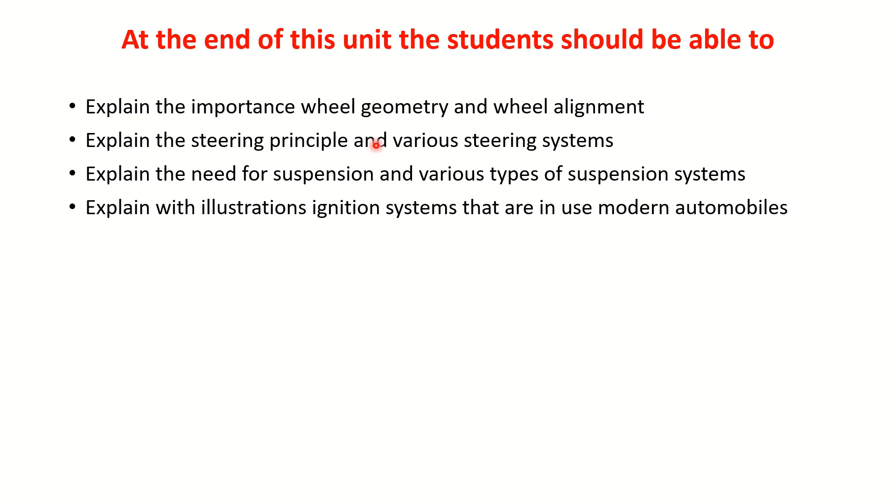Basically, in the car, our idea is while running the car, the wheel should remain perpendicular to the ground and the wheels should be parallel to each other. So we say that a wheel alignment consists of adjusting the various angles of the wheel so that they are perpendicular to the ground and parallel to each other.

So the purpose of this adjustment is to have maximum tire life and a vehicle that tracks straight and true when driving along a straight and level road.

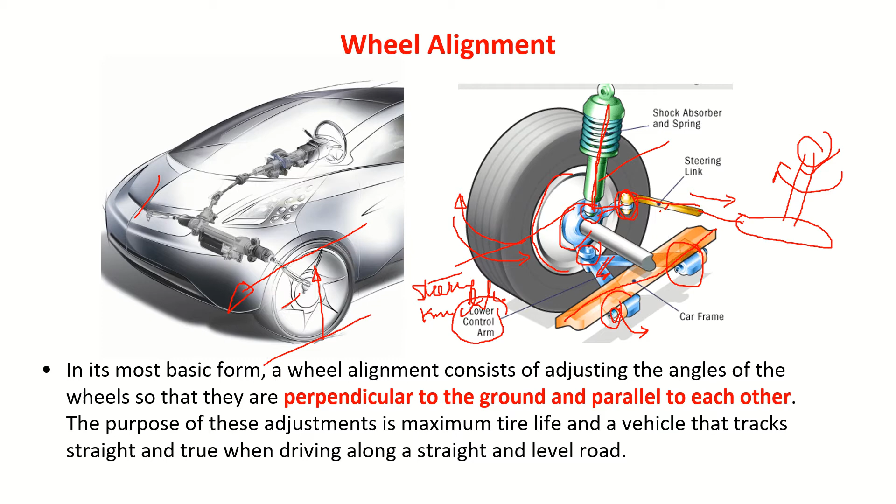Same here also. Or due to some reason, these linkages may get damaged. And wear and tear of the tire might happen. Because of all these reasons, wear of the steering and suspension components, bent or damaged steering or suspension parts, or sagging springs which can change the ride height of the vehicle, the alignment angles may change.

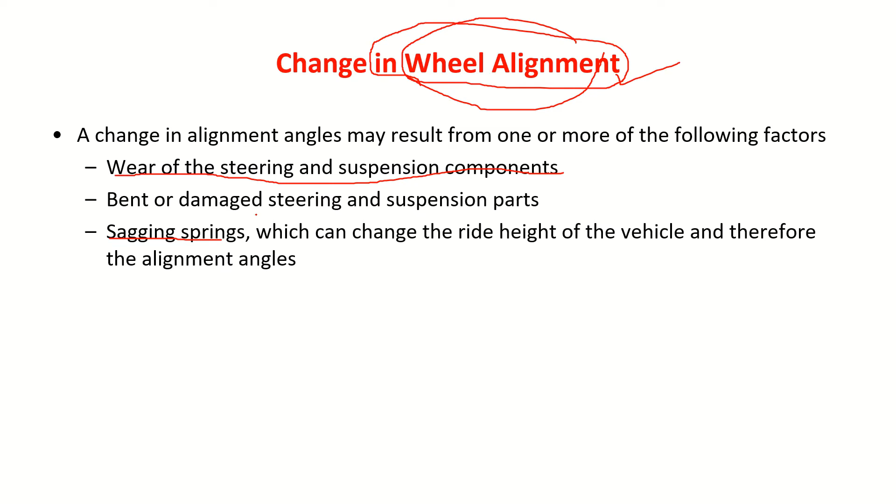So if the alignment angles change, what really happens? When you start steering, you may experience pull. What is that pull? It is defined as a definite tug on the steering wheel toward the left or right while driving straight on a level road. Suppose this is your vehicle.

So while steering, the vehicle may start pulling towards the left or towards the right depending upon which wheel alignment angles are changed. There will be a force and we have to counter this continuously using our steering system. So it will start generating pull. It may make the vehicle unstable sometimes.

Correct? That is a basic problem. Suppose you are running on a camber or a road with crown and all that. It may start drifting. What does drifting mean? It's a mild pull that does not cause a force on the steering wheel that the driver must counteract. When the vehicle moves towards one side or the other, this is called lead or drift; it could be caused by the crown of the road, etc.

Another thing that can happen is wander. Say you continuously have to move your steering wheel like this, continuously correcting. It is a condition in which almost constant steering wheel corrections by the driver are necessary to maintain straight ahead direction. So if the alignment angles change, these are the kind of problems that you face.

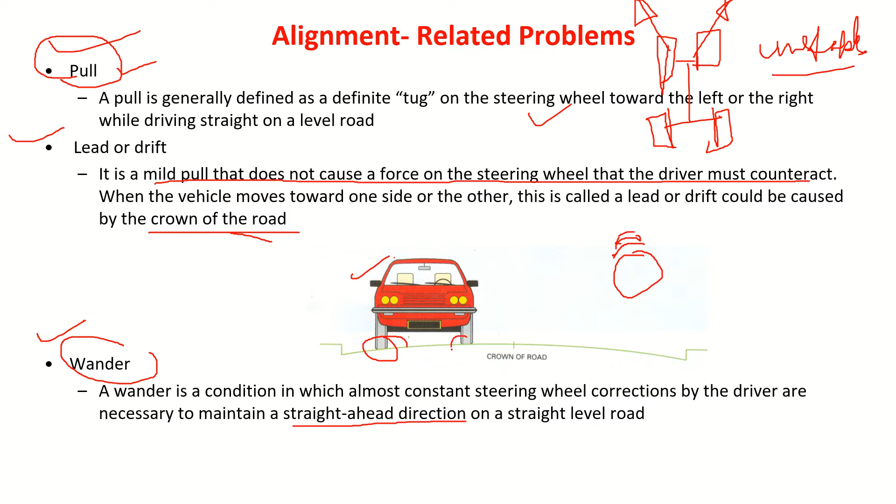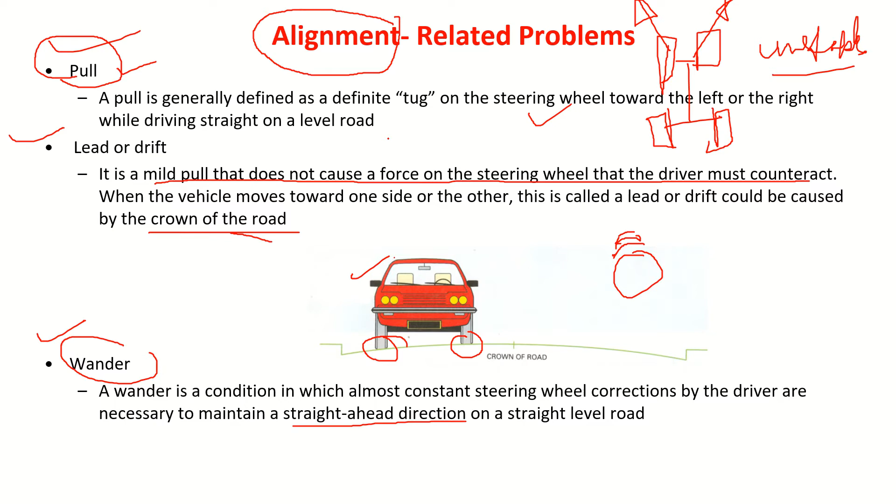Not only that, uneven wearing of tires will also happen. So hence it is necessary to maintain manufacturer specified alignment angles. If that is the case, what are those alignment angles? Let us look. One of the angles that is important is camber.

What is camber? Look here, let me put the tire straight, that is perpendicular to the ground. From the midpoint of this tire, which is in contact with the ground, let me draw a vertical line, and also draw the center line of the tire. That center line and vertical line are just coinciding here. Now, if you look here, from this center point I draw a vertical line. You can call it the line through which the weight will be acting. Then take the center line of the tire. Okay, it will make an angle.

Here also you can see it the same way. A vertical line from the midpoint where it makes contact with the ground, and also the line which passes through the width of the tire, will create an angle. This angle I call the camber angle. Now if you consider this is the center line of the vehicle, this I call inside, this I call outside.

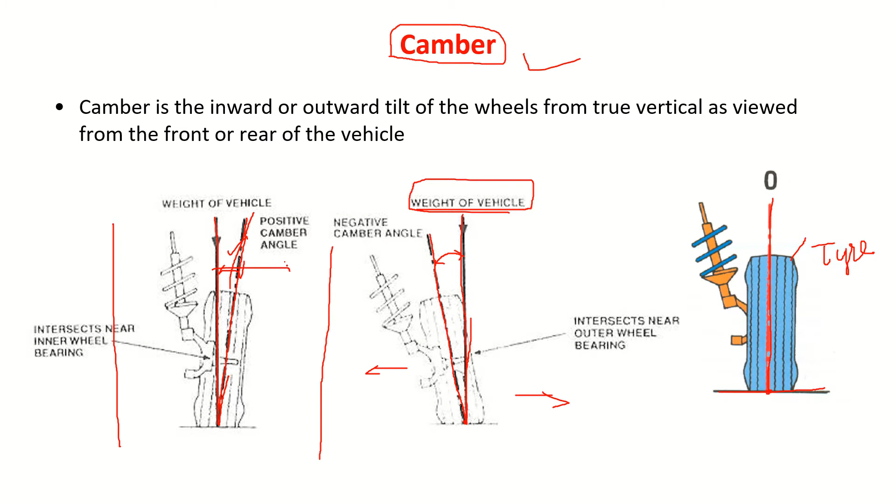Now it is tilted outwards. This I call positive camber. Here it is tilted inwards. I call it negative camber. You can see this, if these are the tires. Now you see the front view of the vehicle. When you see the vehicle from the front, these are the vertical lines. If the wheels tilt outwards, then they will have positive camber. If they tilt a little inwards, then we will have negative camber. So you always have to see from the front view of the vehicle.

Okay, so camber is the inward or outward tilt of the wheels from true vertical as viewed from the front or rear of the vehicle. Hope the point is very clear. So that angle we call the camber angle, with positive camber, negative camber, zero camber. Whatever I explained, I have written down there once again. If the top of the tire is tilted out, then camber is positive. If the top of the tire is tilted in, camber is negative. If the wheel is truly vertical, camber is zero. And we measure it in degrees, whether it's 1 degree, 1.5 degree or 2 degree; we will see that later.

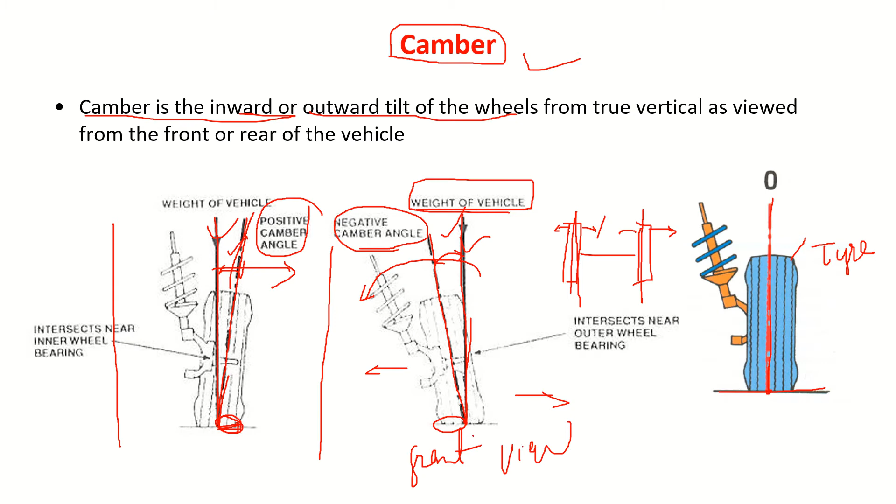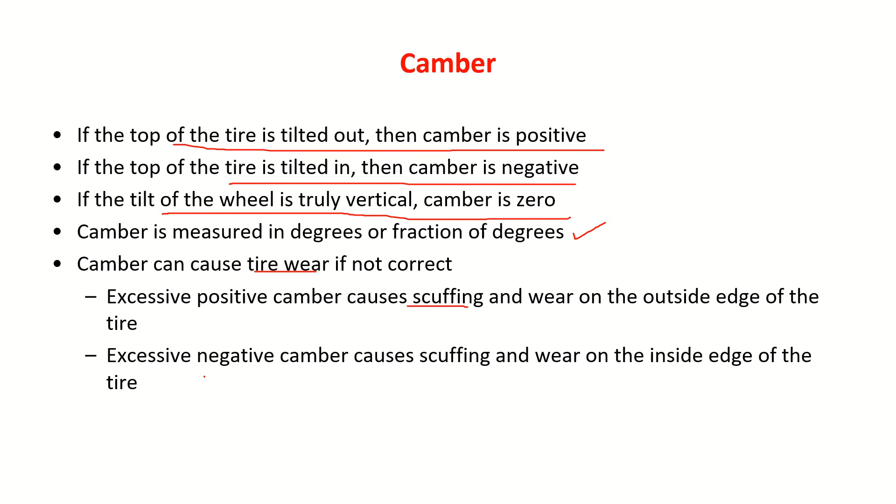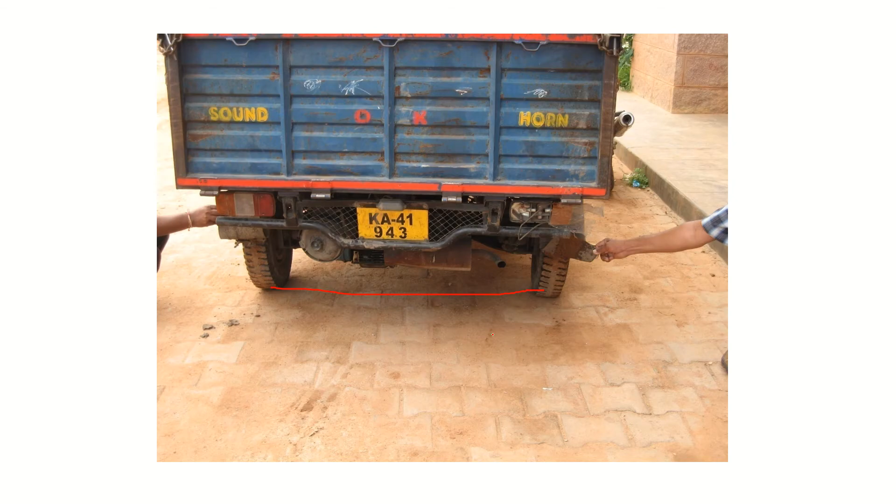It is desirable that the positive camber on both the left and right wheels remain the same. Definitely there will be small variation because of various reasons which I do not want to deal with now. So it is preferred to have the same angle. Okay, right, sir. Now here also you can observe the positive camber.

So now many vehicle manufacturers specify or adjust, they will have positive camber on vehicles. Why that? I have just drawn the three views of the vehicle here. Let us see the front view of the vehicle. So you have suspension and all that.

In the unladen condition, if it is having a positive camber, the wheel would tilt like this a little bit, depending on the camber angle. But the moment it is loaded, the suspension system will push this so that they become vertical, so that while running, they remain vertical.

So camber usually decreases as the vehicle is loaded or when the spring sags. If camber is kept positive, then the running camber is kept near 0 degrees for best tire life, so that there will be a uniform contact with the ground. So that's the idea of positive camber. But there are cars with slightly negative camber also, right? Camber design.

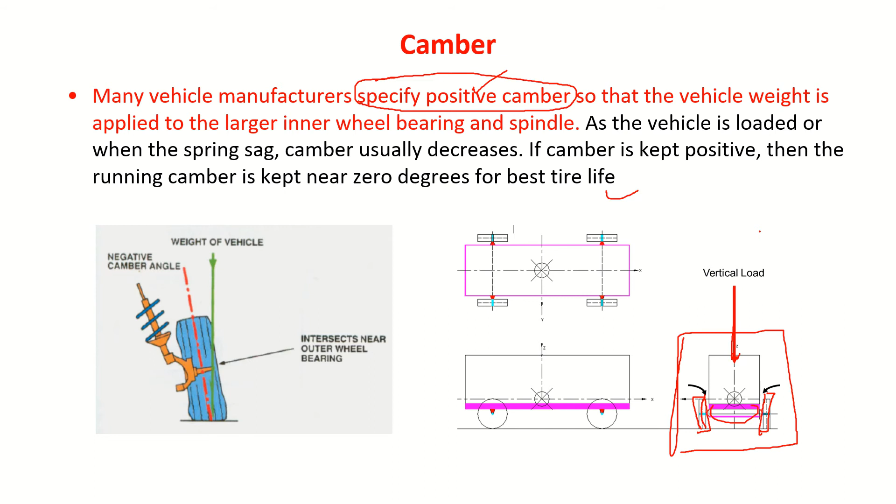So now the next, there is what we call camber thrust. What is that? Let us say we are given a positive camber. The vehicle is taking a turn or whatever it is. You can see that because of this camber, there is a reaction force acting in the outward direction. When it starts rotating, it will be pulling inside. For that, there will be a reaction outside, opposite to this. This reaction is what you call camber thrust.

Correct? So to compensate the reaction, a camber thrust will be active. Camber thrust will always act in the direction towards which the wheel is tilted. That means for positive camber, it is this. So it will create a lateral force. This lateral force I call camber thrust. You can imagine a cone is rotating, it's trying to slide like this. So to oppose that, there is going to be a reaction force.

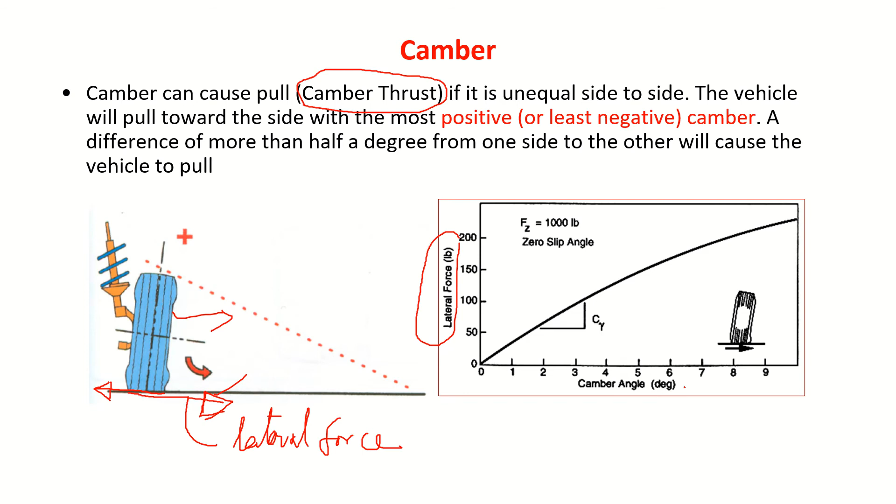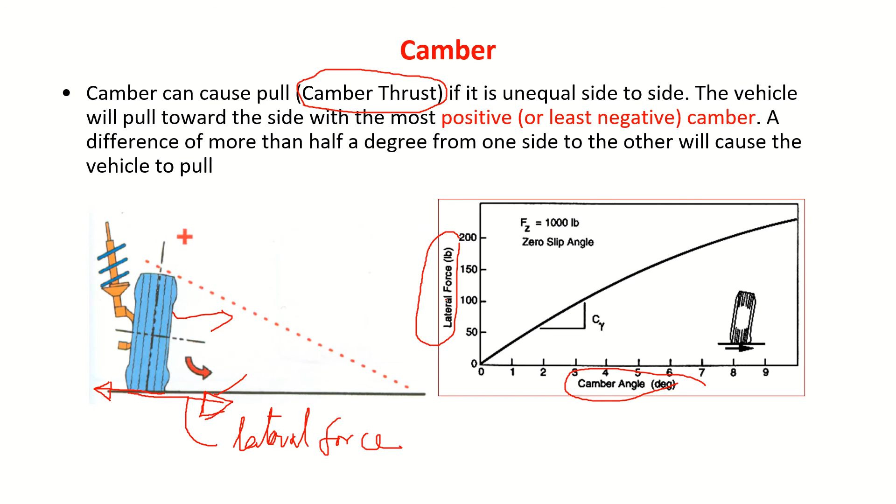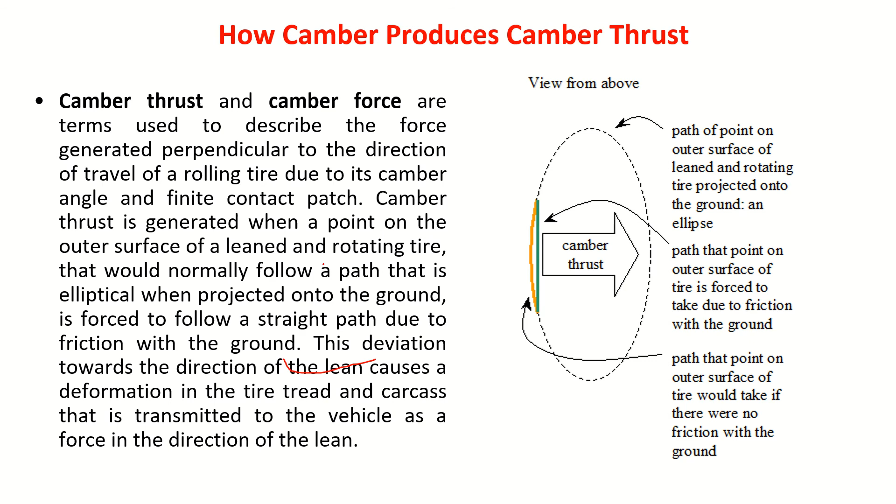Here, this lateral force or camber thrust versus camber angle has been drawn. So for the camber angle, what is the kind of thrust or lateral force it can produce? You can take from here. So this is what I was just explaining, how exactly a camber thrust is created. This is what has been written over here.

So camber changes dynamically, during dynamic conditions. Let us say this is the initial wheel position. This is the upper control arm of the suspension. This is the lower control arm of the suspension. If I just extend these two, they will meet at one point. Let me call it the instantaneous center.

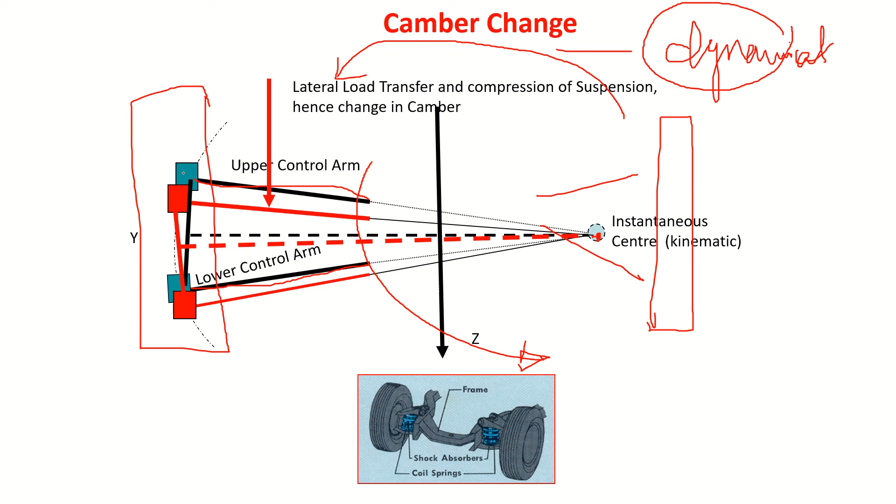So now just imagine the vertical direction. Suppose this vehicle is taking a turn like this. This is the right side or outside, and this is inside. There is going to be a lateral load transfer from left to right. This is exactly what I have shown, the force. Because of this load transfer, it may assume a new position. That's exactly what I said, camber changes.

So here it is like this. The more load gets transferred to this side, the suspension may get compressed. Then the wheel may tilt outwards. This wheel may tilt a little inwards because it gets released like this. So that way it is going to change. Camber changes during dynamic conditions. Whenever you are taking a turn, because of lateral load transfer, camber changes.

But the moment you change the camber, if there is too much of a camber change, then what is going to happen? There is going to be a larger lateral force on this side and a smaller lateral force on this side. There is a chance the vehicle will start pulling to that side.

Okay, now what exactly happens? Let us see now. So this is what I am calling an independent suspension. So here you can see the frame. Relative to this frame, I have fixed the wheel. The wheel will move relative to this, up and down.

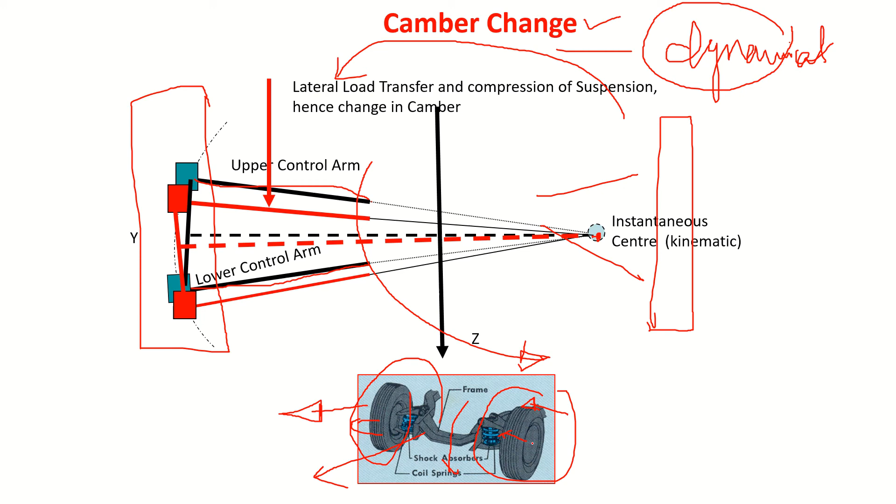If it is moving up, it will not really interfere with this. Means this is independent. The motion of this wheel with respect to this is independent of this. Okay, you can call it an independent suspension also. But if it is a solid one, it is different.

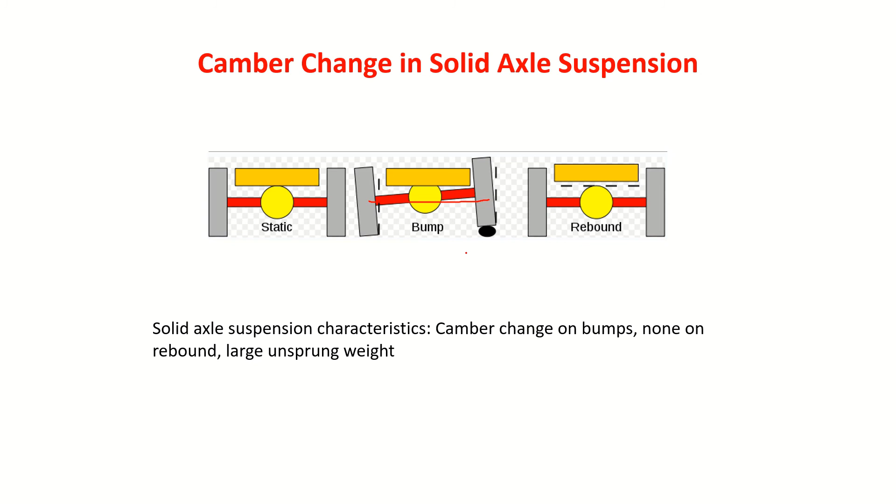By chance, it is the static condition. If it moves over a bump, the whole thing gets lifted up. Again, it comes back like this. Okay, here, because of this, it will happen. Not much with the dynamic conditions and all. But with the independent suspension, there will be a considerable camber change. Okay, I'll just come back to this in 1 minute.

Now the thing is, what is the effect of those camber changes on handling of the vehicle? What do you mean by handling of the vehicle? Suppose this is the vehicle. I am just taking a turn. Let us say the vehicle's intended path is this. When I steer, this is my intended path.

By chance, after giving the required steering input, the theoretically calculated input, this is what exactly it should follow. When I give that, it will not follow this path. Instead of that, it may start following this path. So to bring it to this path, I have to steer more. This I call an understeer condition.

Correct. Suppose I have to steer less. Instead of that, the vehicle takes a turn like this. Then I call it an oversteer condition. So in both conditions, too much understeer also, I need to be extremely careful. I need to put in a lot of effort to make the vehicle follow the desired path. Here, without putting much effort, on its own it might turn dangerous. So need to be careful.

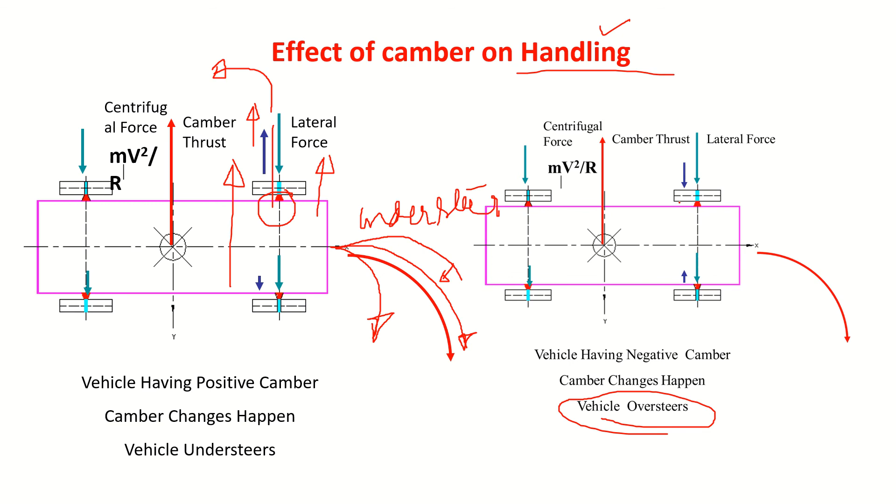That means basically this wheel is suspended. That means the suspension system has to be carefully designed so that the camber changes are well within the limits. That's a very important thing, right? So now, in service, as I said, because of wear and tear, camber might change. Quite often we go for wheel alignment of the vehicle. During wheel alignment, the mechanics try to maintain the original camber angle.

Some cars may not have made any provision for camber change, but in some cars camber can be adjusted by moving the upper and lower control arm or strut assembly by means of shims, eccentric cams, slots and all that. Another very important thing is that camber should be equal on both sides. However, if camber cannot be adjusted exactly equal, make certain that there is more camber on the front of the left side to help compensate for the road crown, half a degree on the LH.

What should be the camber angle? All the angles, I will give you in a specification sheet. Okay, so this is all about the camber, but it will all lead to the design of suspension: how exactly a suspension has to be designed to maintain the required camber. So we will discuss another important wheel geometry in the next video.